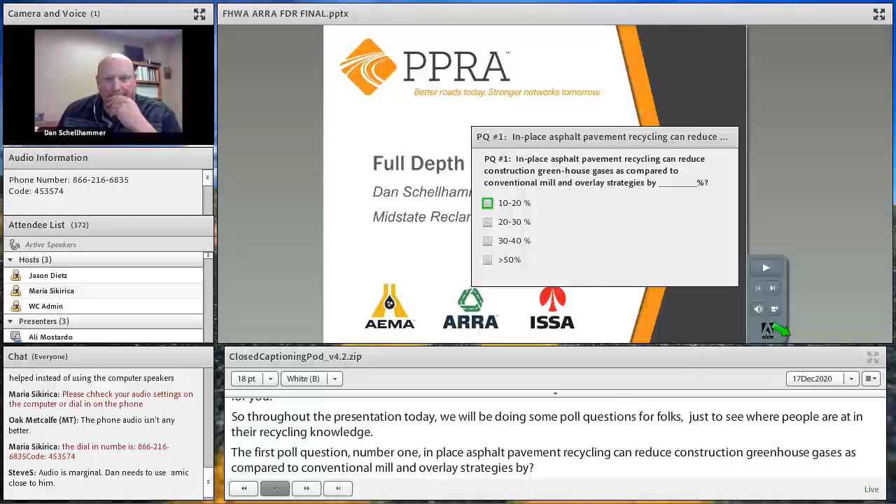Yeah, we're seeing some interesting numbers coming in here. The answer is more than 50%. So when you utilize that tool in the right place and the right job, it can be really beneficial when you're looking at sustainability and project performance there.

So speaking of sustainability, that's one of the things that we're looking at here on our projects. When you utilize the right pavement recycling technique on the right job, you're going to realize substantial CO2 savings. It's going to be very impactful to the sustainability overall of the job, because we're recycling, we're using materials in place that are already there. We're eliminating many, many loads of materials coming to and from a project, and it can be really impactful when you look at the process from a sustainability perspective.

One of the mantras you'll hear from ARRA, our association, is utilizing the right tool in the right place at the right time. There are many different asphalt recycling strategies one can use on projects. The secret to the sauce is utilizing the right tool on the right job at the right time. Once you do that, you're going to save money versus a conventional construction technique.

So keep in mind as we have our conversation today, that when you use the right tool, the right time, the right place, project selection is key. You don't want to jam a square peg in a round hole, because if you do the wrong recycling technique on the wrong job at the wrong time, it'll end up costing you more money, and you won't be able to realize any of those economic or sustainability gains.

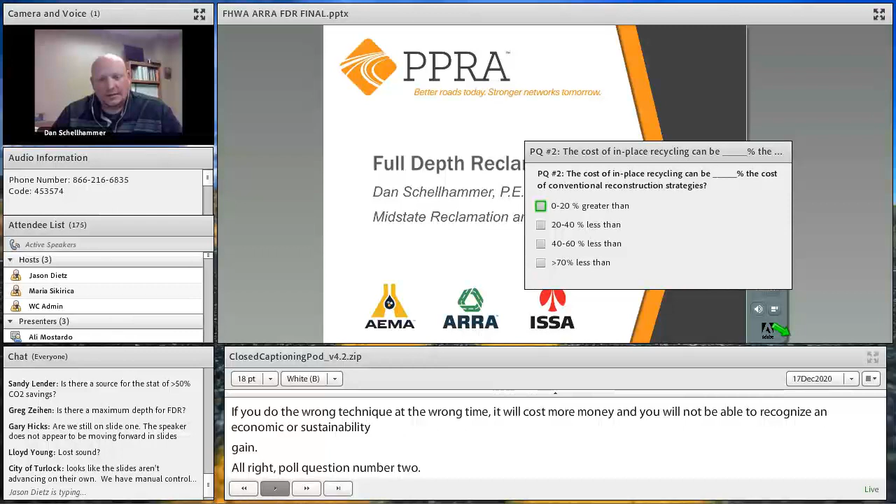All right, poll question number 2: the cost of in-place recycling can be blank the cost of conventional reconstruction strategies. Let's see what folks out there think.

All right, the answer is 40 to 60%. So some good guesses out there from folks. Thanks for participating in the poll.

As I alluded to earlier, full depth reclamation, that construction technique, we like to refer to it as the multi-tool of pavement rehabilitation. There are many different applications in construction where you can use a modern reclaimer. The 4 we're going to focus on today, probably the most popular underneath that FDR umbrella: number 1 is asphalt pulverization, 2 is soil drying or modification of materials in place, incorporating liquid additives to stabilize a layer, and incorporating dry additives to stabilize a layer.

In the asphalt pulverization process, we're going to bring out a modern reclaimer. That reclaimer uses a high-speed upcutting drum to pulverize the full depth of in situ asphalt. The end result is a recycled blended material that you can use as an aggregate base for your roadway project, or add stabilization additives to gain structure for your roadway.

There's a lot of science and technology working behind the scenes for the performance of a modern reclaimer. Once you conceptualize the way a reclaimer works, it's very similar to a garden tiller. Instead of being 9 inches wide, it's 8 feet wide and has 800 horsepower behind it. It's a very powerful machine.

Then the tooth comes in contact with the bottom of that asphalt layer, rips its way up and through that HMA, and comes back around to take another bite of it. Once that material is free of the asphalt layer, it's in the housing and being crashed and banged around. There are impact plates and breaker bars around that housing.

As we're working our way on down the grade, the end result is a nice blended base. What you generally see on an asphalt pulverization project is a reclaimer out in front, pulverizing and sizing that material, followed by a roller—generally a pad foot roller, because we're doing a deeper type of recycling process, 5 to 12 inches—and a blade will follow behind that to smooth the material back down, then we'll finish roll it with a roller.

Something for folks to keep in mind about a modern reclaimer: it has hydraulic doors on both the front and rear side of that housing. The hydraulic doors are there for access for maintenance items, for putting in new teeth, doing welding on the drum, and those types of activities.

When the doors are closed down and in operation mode, that rear door can sometimes act like a screed. What does a screed want to do? A screed wants to push big chunks down and fines to the surface. So a best practice when doing asphalt pulverization is to always dig down below the surface and see what type of gradation you're getting.

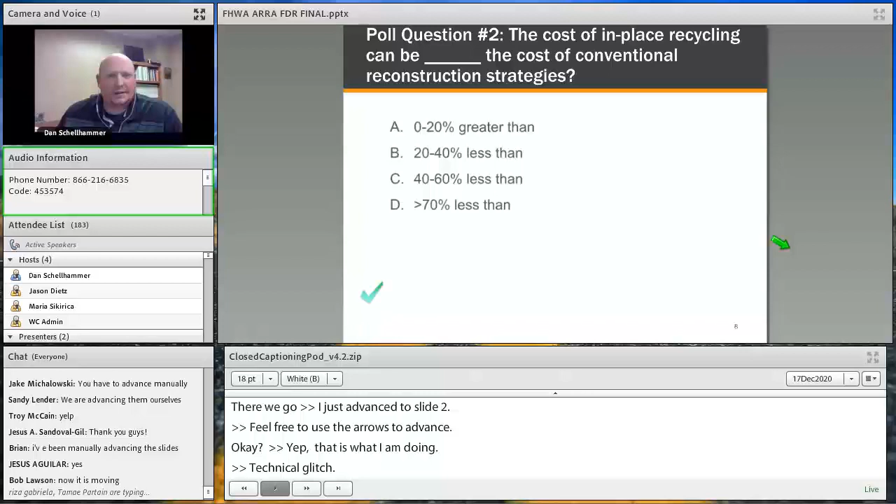Generally, I talk about having to get underneath that asphalt layer. We need to be a minimum of 1 inch below that asphalt layer to cool the teeth in the housing of the reclaimer.

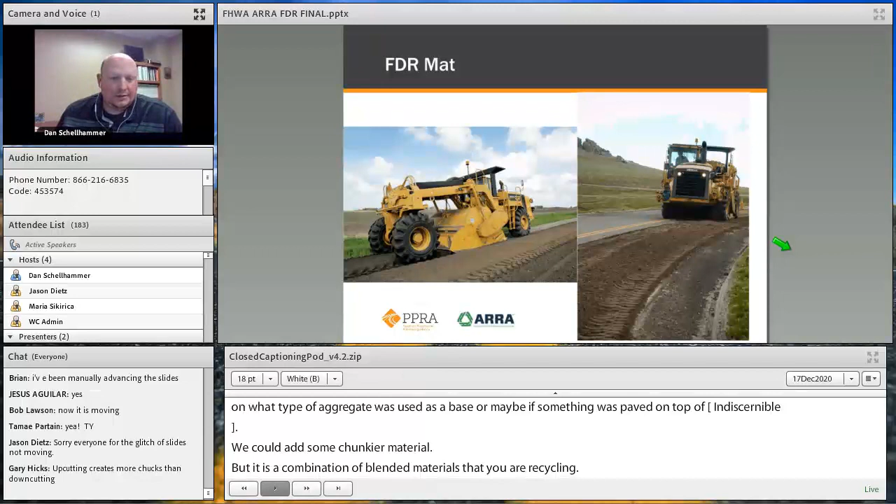Another item of work you can do in the FDR process is soil drying or modification. So what we're doing in this situation is you'll have a project where the grade is over optimum and it needs to be dried down quickly.

Generally, the way folks handle that today would be to farm that material, disc it up and let nature air it out as much as possible, or do a removal and replace with drier material. With the FDR process, you have a third option: modify that over-optimum soil with a dry additive. It could be cement, lime, or something else. It's a great application of FDR.

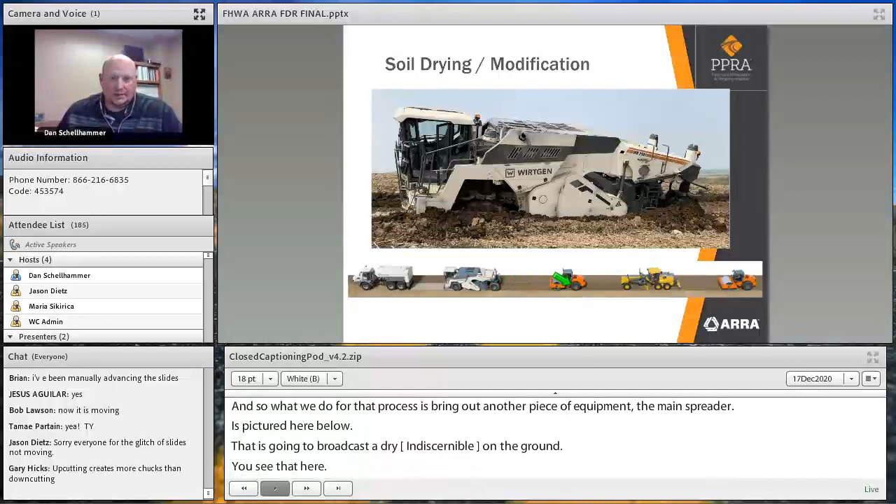As we work our way down the grade, depending on how wet it is, we may or may not want to initially roll that material. You might need to give that additive some time to dry before shaping it, then it'll be graded and finish rolled.

Again, in this scenario of soil drying and modification, it's not an engineered solution. All we're trying to do is dry down that material to a point where we can pass a roll test and work without yielding under any type of loading put on top of it.

Another option under the FDR umbrella is liquid additive stabilization, blending in situ materials with liquid stabilization additives to improve the performance of the engineered stabilized layer. In this scenario, we're able to enhance the material properties of the existing materials on site by adding the liquid stabilizer.

Through this process, we bring out a load of liquid material. It could be emulsion, foam, calcium chloride, or magnesium chloride—we'll talk about that more later. That material is actually injected into the housing of the reclaimer and then blended with the base in place.

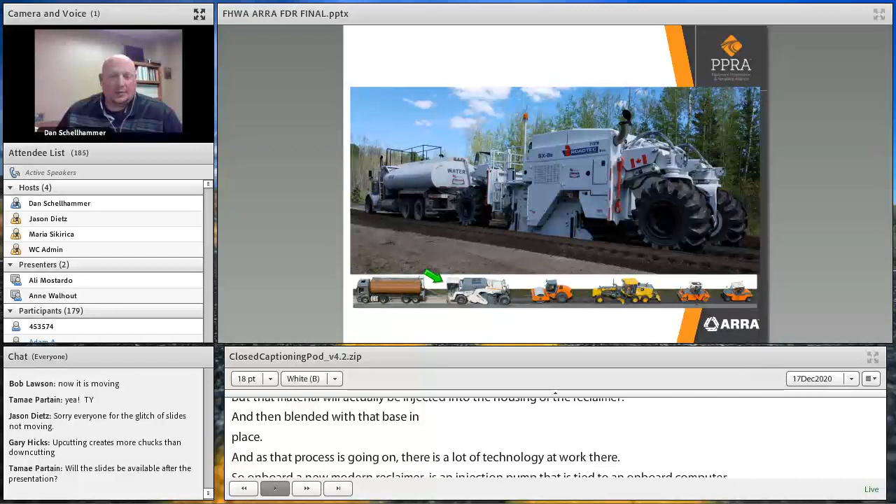As that process is going on, there's a lot of technology at work. On board a modern reclaimer is a calibrated injection pump tied to an onboard computer. The onboard computer knows the speed of the reclaimer and the depth it's cutting, and it takes care of injecting the precise amount of liquid into the stabilized base. After the material is blended, it will be rolled, then bladed, then finish rolled.

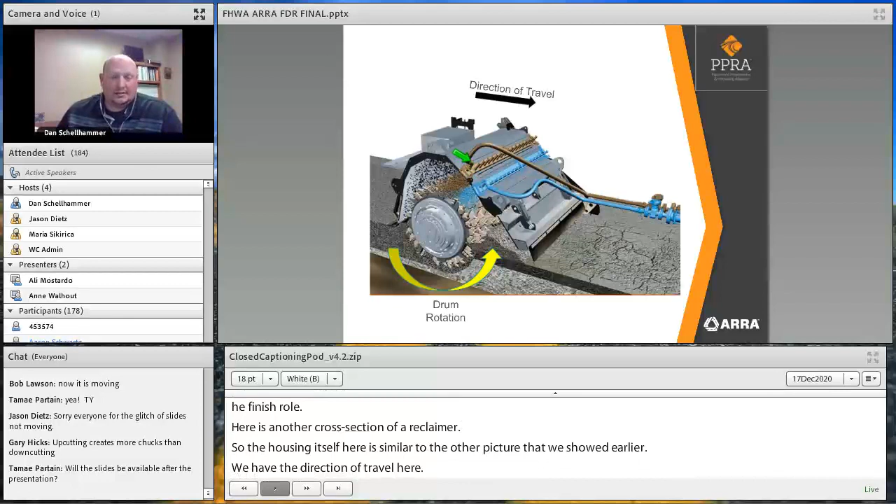Some reclaimers can inject 2 types of liquids at a time. Some only have one, some have none—it just depends on what package the contractor puts on the reclaimer. But in order to do it efficiently and correctly, injecting through that onboard system with an injection pump and a calibrated computer is definitely the way to go.

And then we have dry additive stabilization. Similar thought process, just the additive is dry instead of liquid. We want to engineer or improve the structural capacity of that layer so we don't have to import additional rock or make other pavement design choices at expense to our project. So we make our in situ materials perform better by adding dry additives.

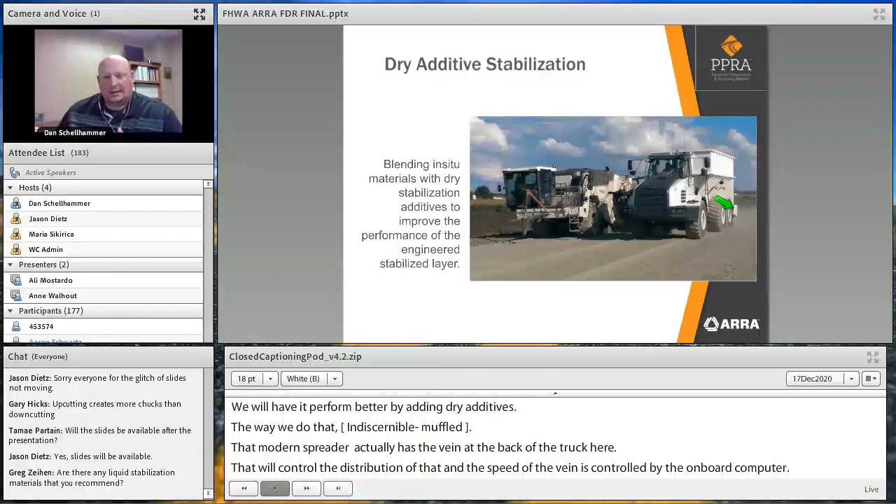The way we do that is with that modern vane spreader. It has a vane in the back of the truck that controls the distribution of that powder. The speed of that vane is controlled by an onboard computer, which knows the speed of the truck and where it is in the world at all times, so it can very accurately distribute that additive on the ground. These modern construction technologies are what has made the FDR process much more repeatable versus maybe some experiences folks had 20, 30 years ago.

When we're doing dry additive stabilization, we're adding a step with the spreading of that material on the ground. Generally what happens is because we're adding this dry additive, it's going to absorb the in situ moisture that's in our stabilized layer, so we need to compensate for that so we can get good density out behind the reclaimer.

We compensate for that by adding water with a water tanker. We hook up that water tanker to a reclaimer just like we would on a liquid stabilization project, using the same technology—that injection pump and onboard computer—to get a precise amount of water incorporated into the blended mix that comes out the back of the reclaimer.

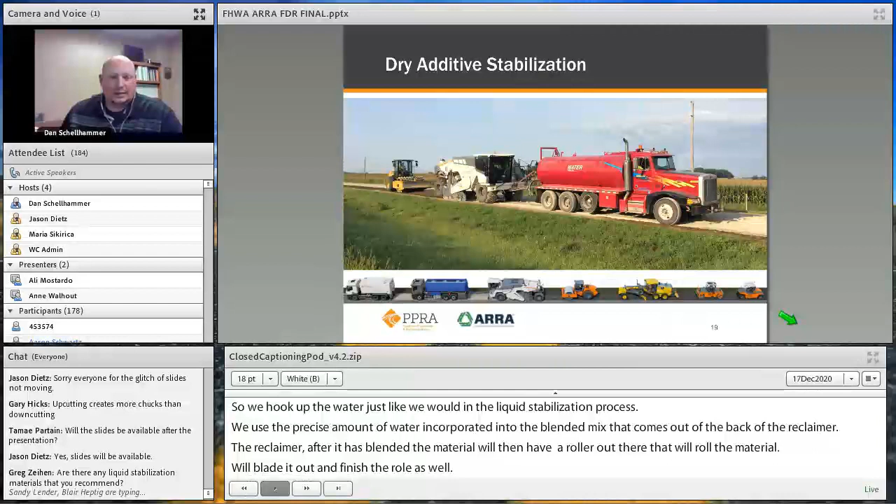The reclaimer, after it's blended that material, will then have a roller out there that'll roll that material. We'll blade it out and then finish compact that as well. Really, optimizing the amount of water we add to that mix is key to ensuring we get good density behind us, in a consistent stabilized layer we can count on for years and years.

So the front of the FDR train, with all that technology going on with the modern reclaimer and the modern vane spreader, is generally where folks like to focus because that's new and amazing and great technology. But the back end is just as important. It's critical to have your compaction and blading fleet, compaction and layback fleet, working in concert with the group up front.

The initial compaction needs to happen with a large pad foot roller because we're stabilizing depths at 5 to 12 inches. And once we do that—one question: are separate pulverization and mixing passes necessary?

This would take a little breakdown. In our experience, yes, they are generally necessary, because once you add an additive, you can't go through and reblend that material. So our preference would be to do an initial pulverization pass and appropriately size that asphalt, then add the stabilization on a secondary pass.

But getting back to initial compaction—you're going to want to use a large pad foot roller for that deep section, and the pad foot roller is going to need to walk back and forth until you start seeing the underside of that drum. You start seeing the pads lift the drum up out of the ground, then you know you have density. It's just a great field observation to make.

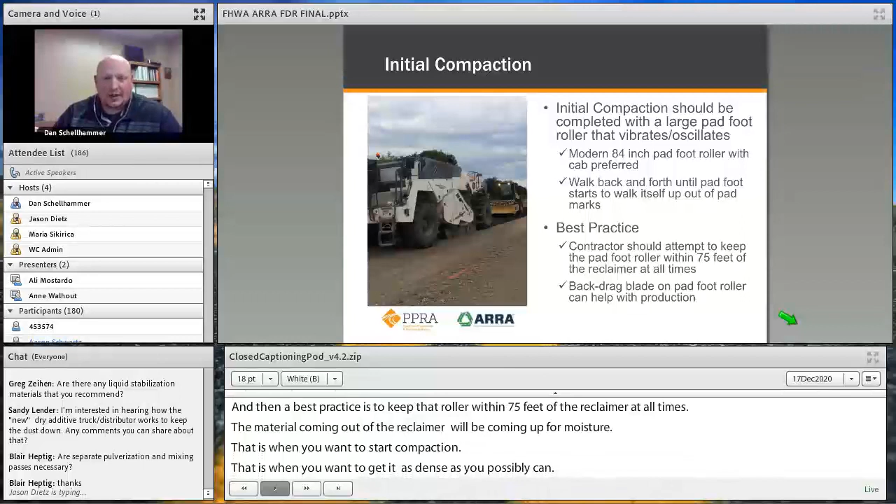We want to get that material as dense as we possibly can. So by keeping that pad foot roller up near the back of the reclaimer, we ensure we're compacting that material at optimum moisture. Then having a back drag blade on a pad foot roller helps out with production a bunch. That's just a better practice, I would call it, not a best practice. It really reduces the work a blade operator needs to do.

After we've done our initial lay down, or the initial compaction, we're going to lay that material back. Generally, in the industry, this is done with a motor grader. Some folks do it with a dozer. Any type of blade will work on a smaller scale project, even a skid steer. A skid steer with a good operator can accomplish this as well. They wouldn't be able to keep up with high production, but it can work. I've seen it work.

What we're going to want to do is initially blade up down to the bottom of the pad marks from that pad foot roller. Basically the bottom 3 to 12 inches of that layer has been compacted. We then need to get those pad marks filled back in and reblade it, and do some final compaction to get the top 0 to 3 inches compacted.

Best practice with the blade, you want to get to the bottom of those pad marks. You always want to maintain the width of the roadway. So an experienced blade operator is worth their weight in gold, especially in today's skills market.

If you have an operator that's not experienced, they'll end up trying to waste some of that material into the ditch. What that's going to do is actually skinny up your stabilized layer thickness, and you need to keep that material up on top of the road top. You don't want to be wasting that material down the ditch. You want to keep it up on top and reestablish that cross slope and profile of the road.

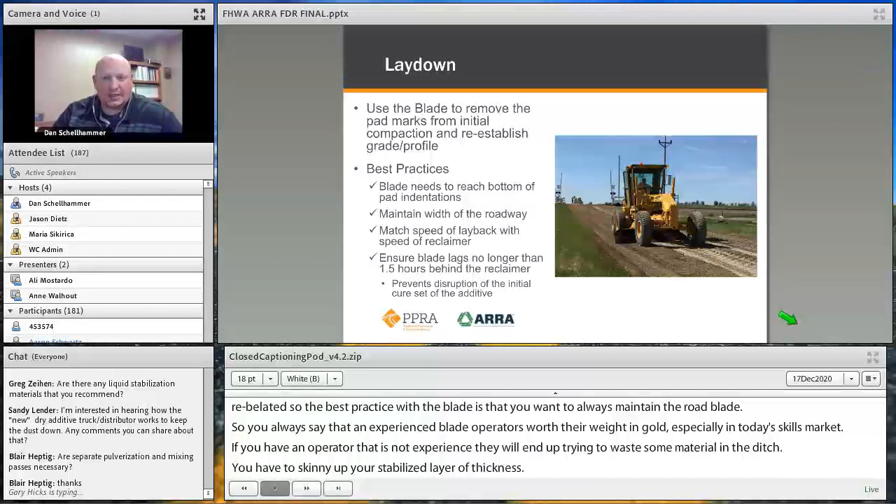And you need to keep up with the reclaimer, and never lag more than an hour and a half behind that reclaimer with your blading work.

Then you want to form your final compaction on that top, 0 to 3 inches of depth. The pass count will be established by rolling pattern. You want to be checking the moisture contents, make sure you're still within the optimal mix design. And then you want to finish that final rolling pass within 2 hours of the blending of the material.

We really don't want to mess with exceeding that 2-hour limit, because that's when your stabilization additives are starting to form their bonds. They're starting to cure themselves out, and grab onto particles to hold everything together and give you that structure. If you're on it past 2 hours, you break some initial sets and you won't realize the full potential you have for really strengthening that layer.

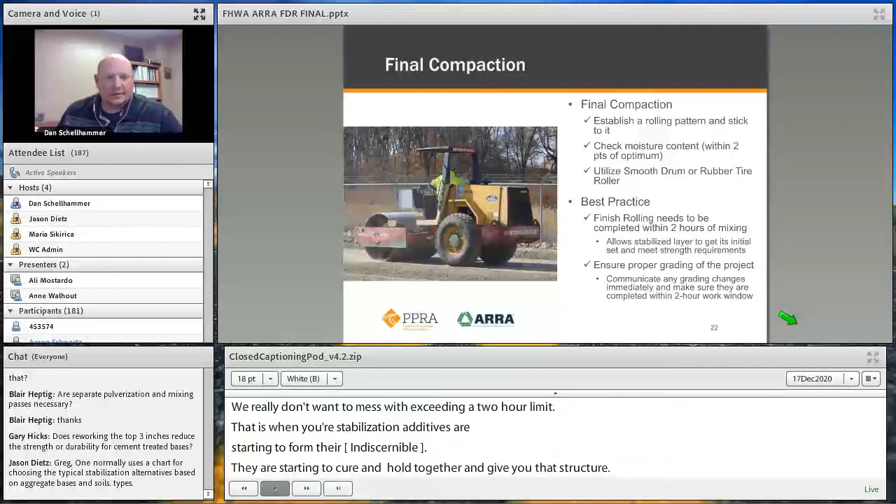All right, so walk through those 4 construction processes underneath that FDR umbrella: asphalt pulverization, soil mixing or modification, liquid stabilization, and dry additive stabilization. All those have the right time that they should be used, and the right pavement condition, with the right in situ material composition. And so another subset of that is you have to use the right tool, the right time, the right place when you get to additive selection.

There's many different types of additives available in the market today. I just tried to list some of the more prevalent ones that are available. On the dry side of things, the powder side of things, you'll have cement types 1 and 2. Just your regular run-of-the-mill cement works really well for stabilizing. It's not near as efficient as lime could be for drying, though.

Lime is a great drying agent that can be either quick lime or hydrated lime. Lime also, in the right conditions in soil with a high enough PI, can also be a stabilizer as well, a really efficient, cheap stabilizer.

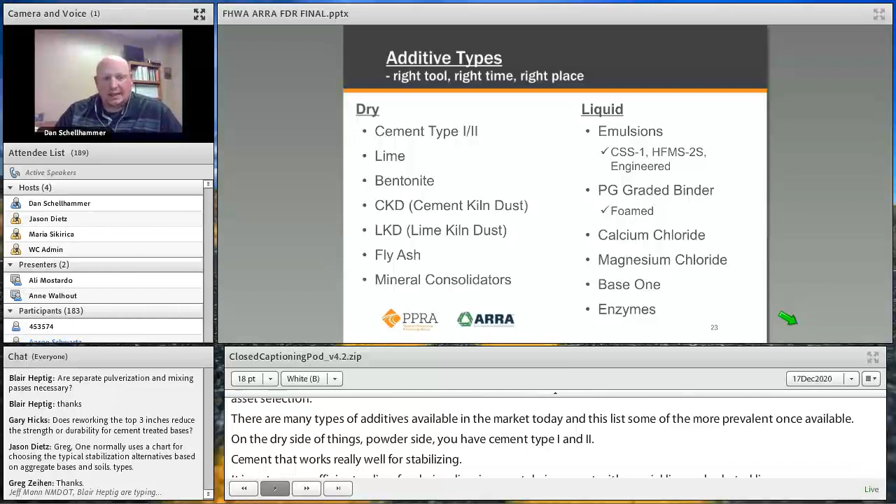We've used bentonite in the past for pond liners, not so much of a roadway application, but I want to point out that the FDR process is really flexible. It can be used in lots of different places. And there's some byproducts that are available that might save some folks some dollars. Those are cement kiln dust, lime kiln dust, and fly ash. All those at varying degrees of availability. Some regions are easy to get a hold of, some they're not.

Fly ash is the one that's really hard to get a handle on, especially because the climate's changing really quickly. So most power plants are switching from coal as their fuel to natural gas, which is making fly ash for stabilization groups harder and harder to come by. Most of the fly ash we're seeing is getting consumed by ready-mix companies. So that's a regional cause and effect, I would say, depending on where you're at.

The mineral consolidators, those are things that help kind of realign the existing particles and give you some extra structure, or might be able to help you dry some things out.

On the liquid side, we have emulsions. Most folks have moved to using engineered emulsions at this point. Not too many people are still using CSS-1 or HFMS-2S.

There's PG-graded binders that you can foam, that hot oil you foam, and incorporate into your asphalt pulverized base. Calcium chloride, magnesium chloride, base one enzymes - these have all been used as well in that type of application.

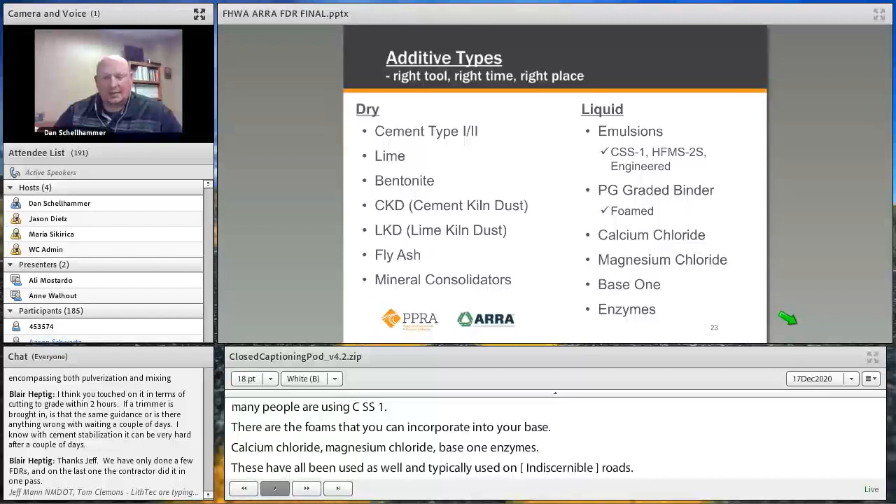Generally those are used on lower volume roads, gravel roads. We've seen calcium chloride used really successfully on gravel road projects where you maybe have to blade that road every 2 to 3 weeks because of washboarding. If you inject calcium chloride and blend it in that top 4 inches, you can reset your blading efforts. Instead of blading every 2 to 3 weeks, it could stretch out to 6 to 8 weeks, which can really help a county or city out that has that type of application.

And with all these different additives, they all have their different price points, and they all work best in different soils and materials. So you really need to optimize the use of those on your project with the material that you have in place.

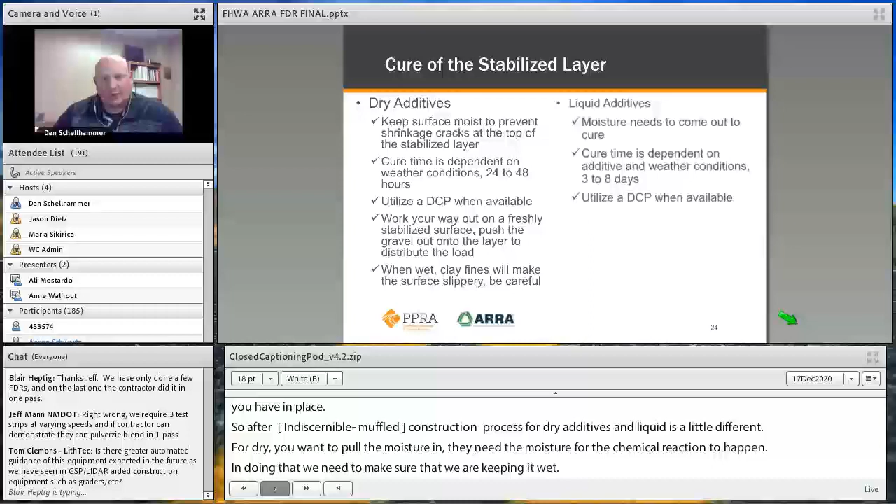So after we've completed our construction process, for dry additives and liquid additives, the curing process is a little bit different. For dry additives, they're going to want to pull moisture in - they need that moisture to gain their strength for the chemical reaction to happen. So we need to make sure we're keeping it wet, either watering down from the top of those stabilized layers, or covering it with a light fog seal to prevent that moisture from escaping. Cure times are dependent on weather conditions, but they're usually 24 to 48 hours.

A great tool to have on a stabilization project is the DCP. They're really cheap, and they prove out, and you can see a lot of repeatable results using a DCP. You use it to watch the strength gain of that stabilized layer, so you know when you can get traffic on it, or when you can load up your trucks or other things. It's a really good tool.

If you do need to get on a stabilized layer early, a better practice would be to end dump that gravel on the stabilized layer and push it out. Don't run loaded trucks over the top of it when it's still fresh and new.

Another safety item to be aware of if you're stabilizing clay: at times after a rain event on clay that's been stabilized, those clay fines can get a little bit wet, the top gets greasy, and it can be a little bit slippery. So if you're putting traffic on something like that, you're going to want to dirty that surface up with some aggregate or something else. Just something to be aware of.

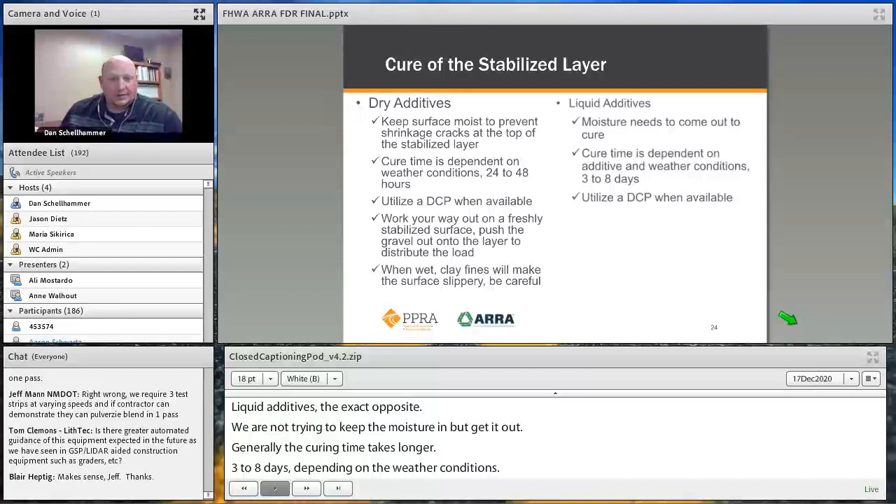With liquid additives, it's the exact opposite - we're not trying to keep the moisture in, we're trying to get the moisture out. Generally that curing time takes longer, 3 to 8 days depending on weather conditions. But during that curing period on liquid additives, the surface is generally more forgiving, so you can get traffic on it a little bit sooner without causing problems. And a DCP is a great tool to use when you're analyzing the strength of that material.

What do we surface this FDR stuff with? Well, it has to be surfaced with something, right? They have higher voids than HMA, so they're susceptible to water infiltrating that stabilized layer. So you need to cover them up and protect them. There's a lot of different options available to folks - those decisions generally come down to economics and traffic volume. We see just one lift of HMA being placed on some projects, sometimes multiple lifts, sometimes fog seals, cape seals, chip seals, or any other type of pavement preservation treatment. If you're curious about the types of treatments out there, you can check out roadresource.org and get more information about the options available to you.

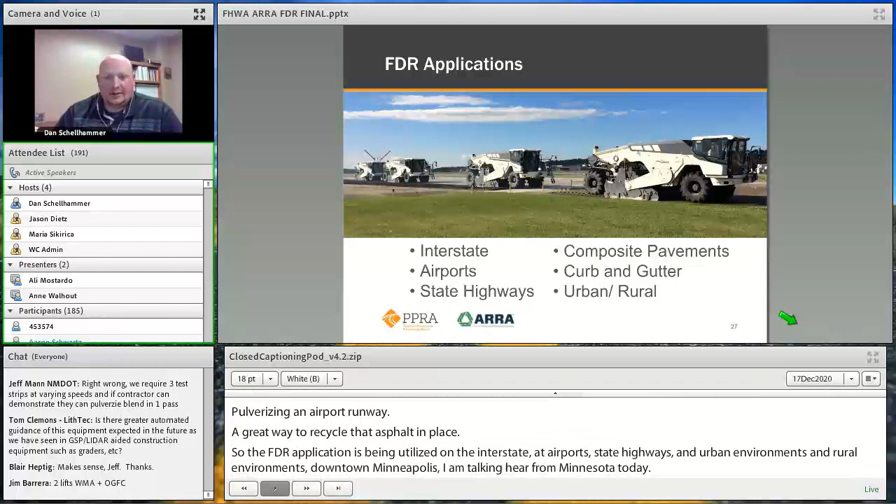Downtown Minneapolis here, I'm talking to you from Minnesota today. It's happening downtown, and it's being used in conjunction with composite pavements, right up next to curb and gutter. So it is a very versatile tool that can help you out a bunch.

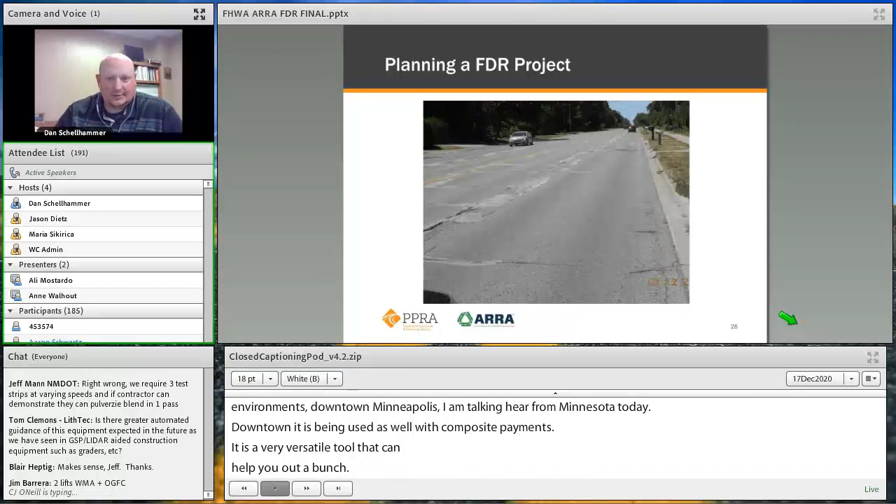Well, I can see some wheel path rutting. I can see probably multiple attempts to do some crack sealing. There's longitudinal cracks, transverse cracks. Some spray patching has gone on. Some more in-depth pothole patching has happened. The asphalt that's there is oxidized and shot.

And so really, you don't have many options left for this road. You're kind of down to that point of needing to reconstruct it. So, well, you should really consider doing FDR. This type of road would be a great candidate for FDR.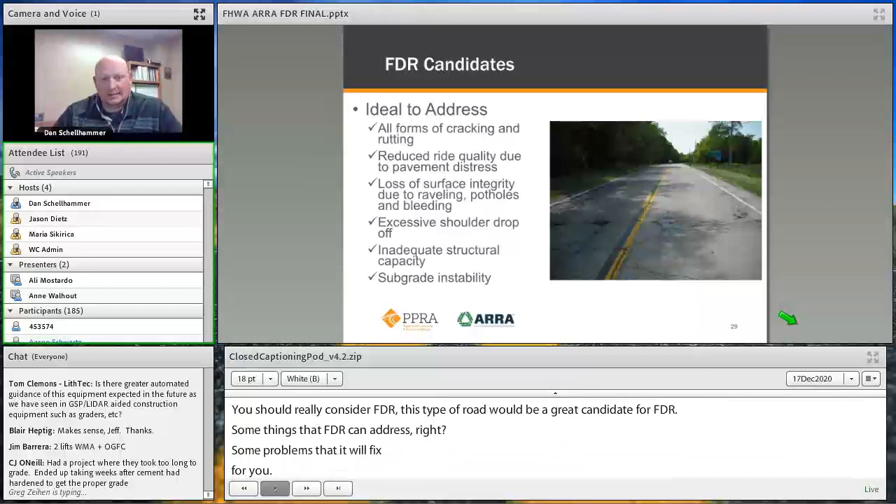And some things that FDR can address, right? Some problems that it'll fix for you. It'll take care of all those cracks and ruts, because we're going to remove that asphalt. Not remove it, we're going to recycle it in place by pulverizing it. So that's going to reset that crack pattern and get rid of all those ruts.

Through that process, we're going to need to overlay it with something, so that's going to take care of your ride quality issues. If you have a road where you're seeing raveling, potholes, bleeding, old oxidized asphalt that's just not holding together anymore, we're going to repurpose it. We're going to give it new life through the FDR process.

And we can definitely take care of shoulder drop-off issues on a job, because we are recycling that material in place. We are going to be able to spread the pulverized material back out and reestablish the shoulder and the cross slope, and build those back up. And then if you do have inadequate structural capacity or subgrade issues, we can stabilize that material, shore it back up, strengthen it, and get it to perform in a way that meets our needs.

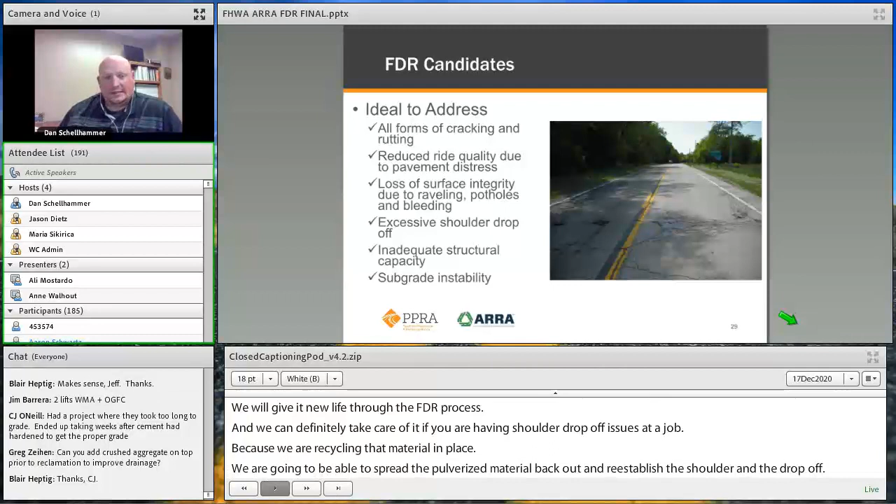So in the pavement planning process, the first thing we need to do when we're analyzing whether a job needs FDR is to perform an accurate pavement assessment. This is really going to be done on any project. What does this all entail?

We're going to take some cores and pay specific attention to those cores as they come up out of the core hole, and document the condition of those cores and really what's going on there. GPR, ground penetrating radar, is a great tool to know how uniform your asphalt thickness is. We need to understand the type of traffic counts that roadway has experienced to date and what type of traffic counts you'll have in the future when we're going through our engineering design.

We're going to want to look at drainage. Water can kill a road. It does often, right? So we have to ensure the water's getting away from our pavement. And then we have to look at that subgrade. Is it strong enough? Is it stout enough? Do we need to stabilize it? Do we need to enhance it? Or is it good enough to just pulverize that material?

And we always want to look at construction records and see how many lifts of chip seal do we have on there. Is there any paving fabric in that stabilized layer or even in the HMA? And just so folks know, reclaiming paving fabric for our company has never been an issue. We generally tear that material up very efficiently and quickly. The only issue you might have is when you look behind the reclaimer at that pulverized material, we're pulverizing paving fabric. We can get that material down to maybe 3-inch by 4-inch max sizing. Generally it shreds up a lot better than that, but you might see a tail flipping up in the air in the back of the material behind you, but we can't remove it. But we can definitely size it down so it won't have ill effects on that pavement structure.

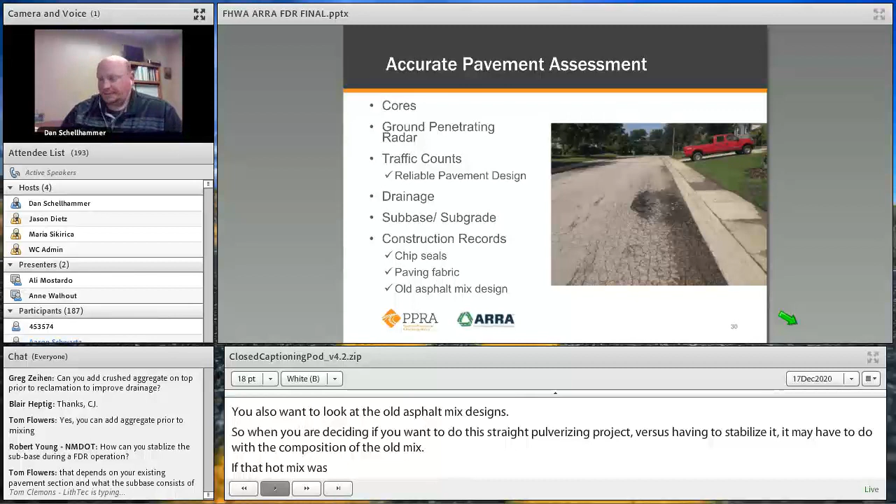When you're pre-planning, there's some new technology and some new tools out there that are really, really helpful. FWD, falling weight deflectometer, that's going to tell you what the strength of your road is. It'll help identify where any weak spots in the road might be. It's a great tool. GPR as well, I kind of said already. And then coring, I'm just going to tell you how deep those materials are.

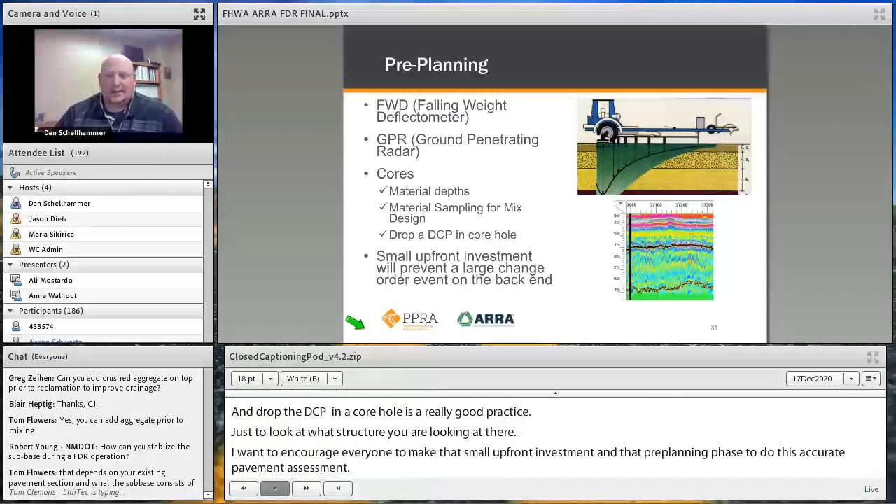So to get you materials for doing a mix design, dropping a DCP in the core hole is a really great practice, just because you're looking at how structurally sound things are. We want to encourage everybody to make that small upfront investment in that pre-planning phase to do this accurate pavement assessment. It's a cheap insurance policy that'll prevent you from having a large change order out in the grade during construction. It can identify a lot of problems that are out there.

I just want to give an example of that, the power of coupling both GPR data and FWD data together on top of each other. So we did a job in South Dakota with a county there, the highway superintendent, and they wanted to do 8 miles of cold-in-place recycling on this project.

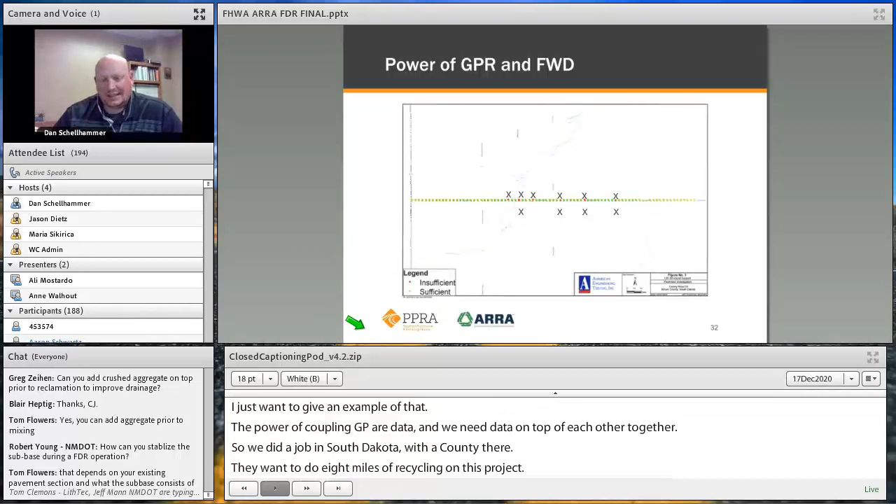And the county highway superintendent had not been in this position very long, didn't really know the history of the road that we were going to potentially recycle. So we encouraged them to go through and do an accurate pavement assessment. And as we went through and did that on this 8-mile section of road, we were able to identify with some really good accuracy areas where he had deficiencies, where he didn't have enough structure to hold up the traffic loading that he was anticipating.

So we were able to then change our plan. Instead of doing CIR on the full 8 miles, what we did was in these isolated locations, we did FDR. We fixed those spots with insufficient structural capacity. I incorporated 12 inches of stabilized material with cement.

So on an 8-mile job, about 7.5 miles got cold-in-place recycled, and the other half mile we performed cement stabilization. And it worked out really well. There were no change orders on the job. There were no soft spots, dig outs, anything else. And we never would have identified those ahead of time if it weren't for that project planning that happened up front.

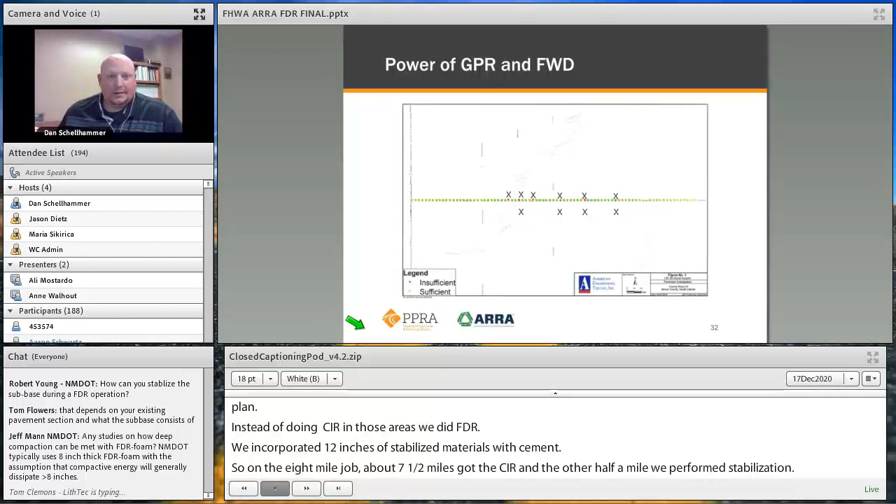So mix designs are a great tool to optimize the amount of stabilization additive we're putting into the road. And that's the goal of a mix design, is to optimize performance of that stabilized layer. There are many different examples out there of what a mix design process can be, specifications and other things. We're not going to go over all that today, but the outcome of a mix design would be to optimize the additive incorporation rate and then communicate to the contractor how much that material needs to get into the stabilized layer.

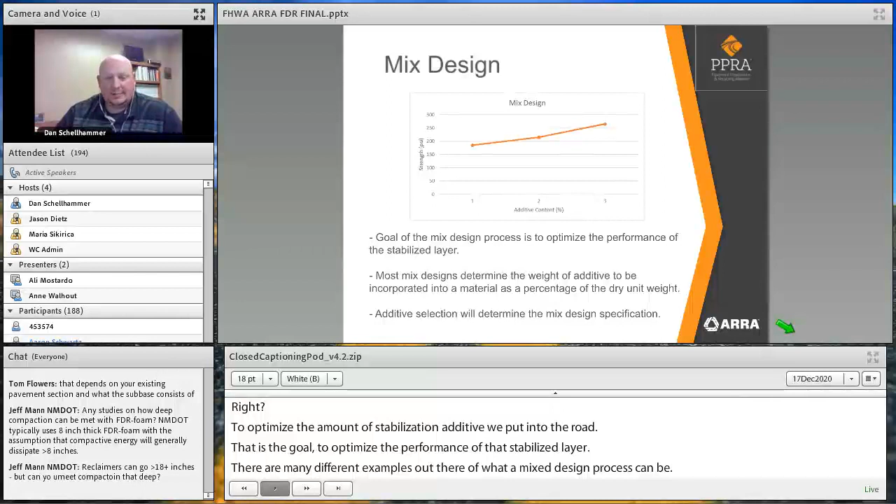Generally, it's communicated to folks in pounds of dry additive per square yard or gallons of liquid additive per square yard. But that's what the mix design process is for in a stabilized type of configuration.

And just best practices for that pavement sampling for mix design, we're going to need a lot of material, about 400 pounds. And what you're going to do is, if there are multiple lanes, you want to vary our sampling across those lanes. You definitely want to vary the location of your samples across the width of the lane as well. Include shoulder material. And then always, when you're pulling the core out, make some visual observations at the bottom of it to see if it's stripped out, and collect some of that stripped material to communicate to the lab what does that base or subgrade look like down below.

The mix design process, we'll be able to see how varying that additive in our mix changes the characteristics. Are we strong enough, not strong enough? How does that help? And develop a curve.

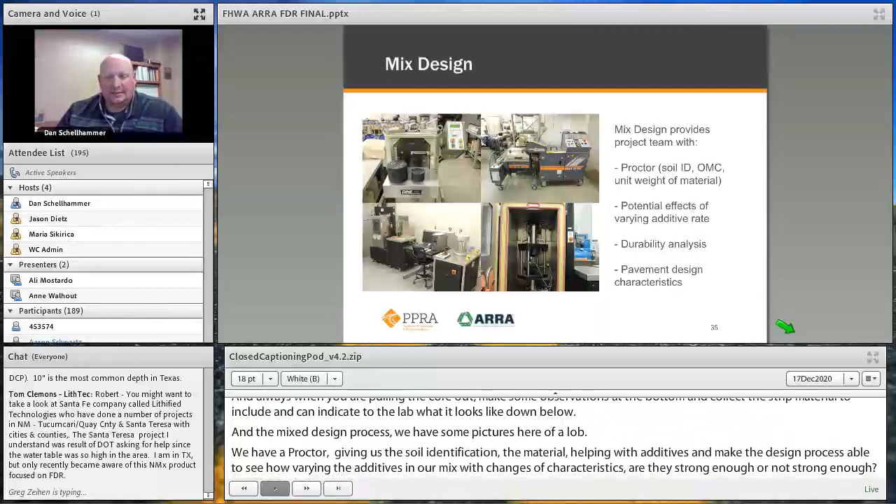We're also going to do some durability analysis if we want to. We can run that material through freeze-thaw scenarios. We can run that material through the Hamburg wheel, looking for rutting potential, especially if you're looking for that stabilized layer to perform at a higher mark. You're going to want to run it through some of that durability analysis. And then we're looking for being able to communicate the pavement design characteristics that the engineer is looking for.

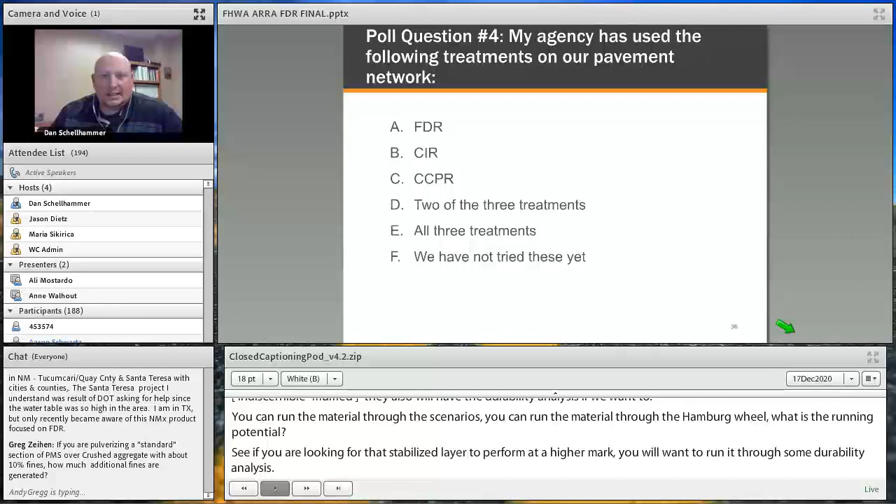We have a poll question here, poll question number 4. My agency has used the following treatments on our pavement network.

It looks like FDR is winning the day there. Good. There are many applications for FDR out there in the world.

So now I want to hit on just kind of the quality control process and some best practices that are available today.

Really, a great quality control program starts out with a rock-solid project specification and knowing what your quantities are, right? So that we can communicate to the team that's building your job just what your expectations are and what your needs are. So it's important to have accurate construction plans, accurate quantities, and then explain to the contractor what your mix design requirements are.

Some entities will do that mix design themselves, pre-letting, and communicate that information to the contractor. Some owners will have the contractor do that mix design for them, and have them be responsible for developing that plan. All they'll do is tell you how the mix design should be performed, how it should be analyzed, the threshold that stabilized layer needs to get up to, and tell the contractor, hey, you go optimize it. So there's lots of different ways to do that.

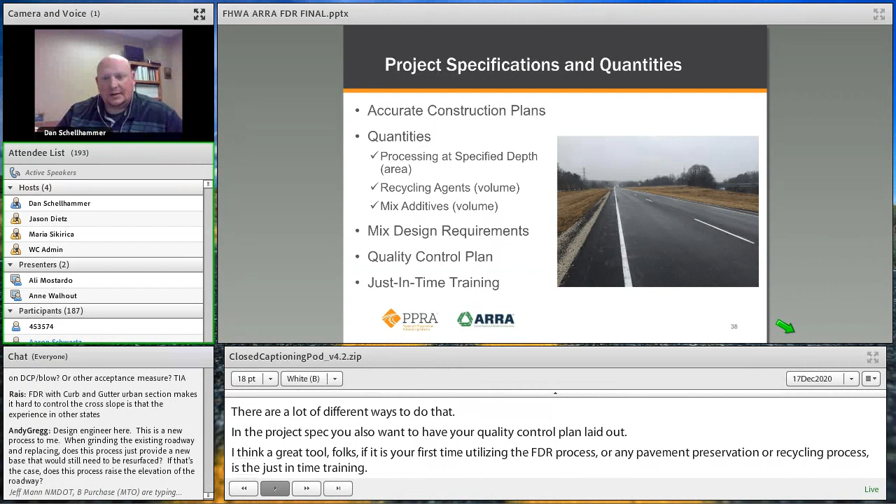The idea behind that is generally about a week or so before that FDR construction process is going to start, the contractor will bring out an industry expert to educate everybody that's on the project team about the process. Any project manager, anybody doing QC, QA out in the field there is going to get some training on just what to expect with the FDR process, how it works, what to look for. I think it really helps create a much better final product, and gets everybody on the same page with where a job can start.

The quality control, right, everybody trusts the contractors that are working for them. But what we need to do is trust but verify what they're doing out there. So in an FDR, full depth reclamation scenario, what are we trying to keep track of? What material properties are important to keep an eye on? Well, number one is the gradation. Whether you're pulverizing or stabilizing, that gradation information needs to be within specification.

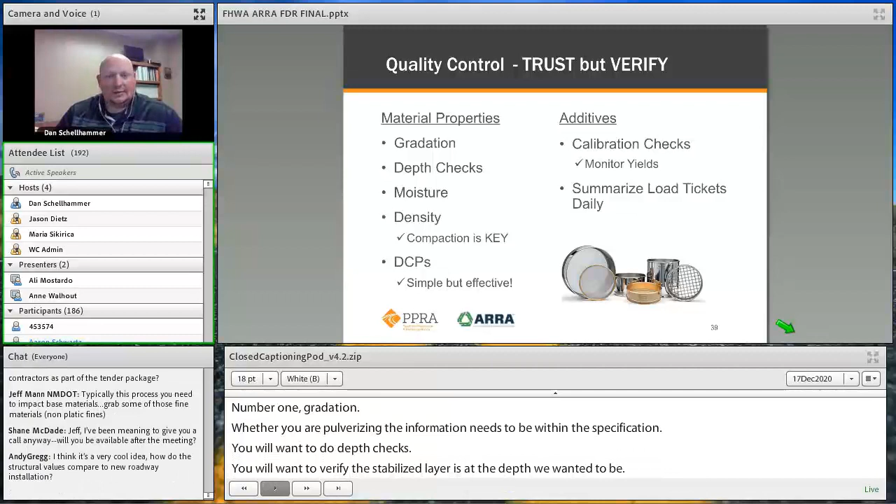You're going to want to do depth checks. You want to verify that the stabilized layer is the depth that we want it to be, or that we're recycling the full depth of asphalt and getting down where we want to be. Moisture and density, those two work together. We need that information. It has to be communicated in real time to the construction team so that we get that optimal density and get compaction. The DCPs, we love using DCP because it gives us a lot of great feedback, real-time feedback, and it's pretty easy to use.

So those are the material properties that we're looking at, and then the tools we're going to want to use, the additives. There's some things we're going to do when we're in the stabilization mode. We're going to want to be doing calibration checks to make sure that the metering equipment we're using is yielding correctly. And as always, you're going to want to summarize the load tickets.

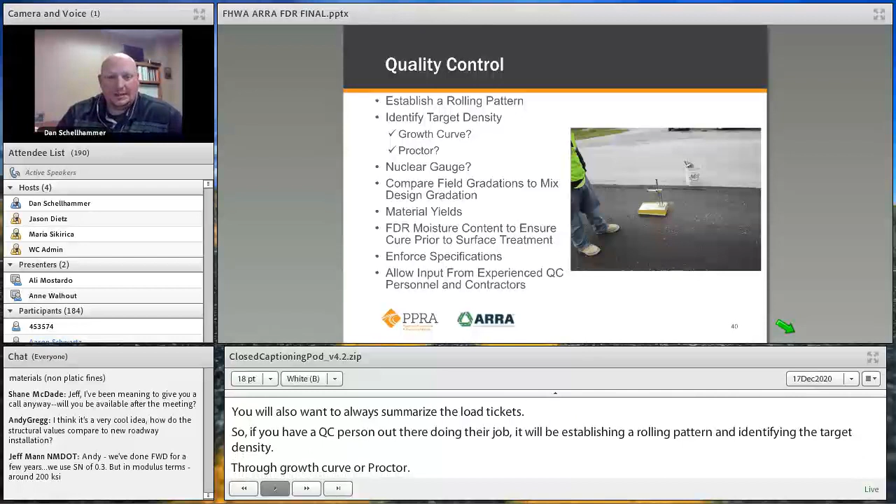So if you're going to have a QC person out there doing their job, they're going to be establishing a rolling pattern and identifying that target density either through a growth curve or a proctor. If you're doing a growth curve, that might need to be done several times a day, sometimes just once a day. But if you're going through varying materials, you're going to need to stay on top of that.

That's done most easily with the nuclear density gauge. We're going to want to be comparing field gradations to mix design gradations. So if those gradations are similar, then our stabilization additive incorporation rate will be spot on. If those field gradations start to differ, then we may need to reprocess some asphalt, repulverize it.

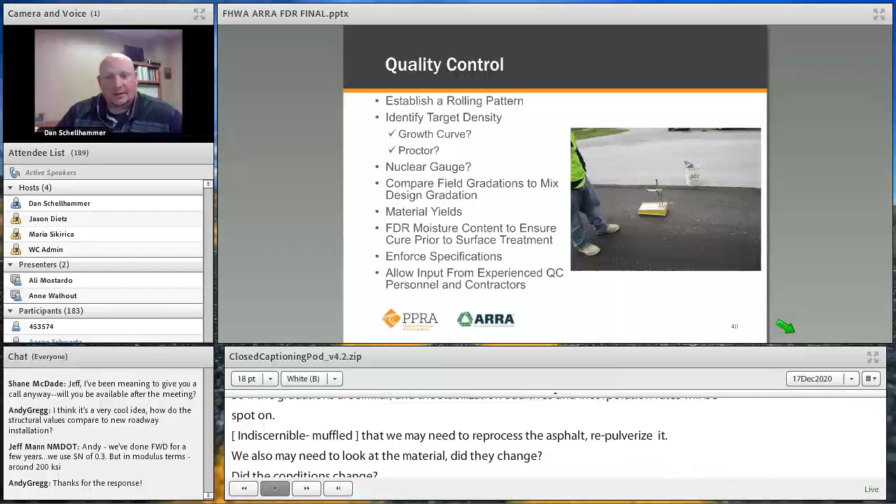We also might need to look at the materials. Did they change? Did the in-situ conditions change? We didn't catch it in the coring phase. We haven't identified it. We have some new stuff out there. We need to get together as a project team, analyze that, and come up with a working process moving forward.

By comparing those gradations, we want to look at material yields, and then after construction, we're going to want to monitor moisture content. Moisture content is going to indicate when we can surface that material. And always enforce specifications and allow input from the contractors, and encourage input from both the QC personnel and the contractor.

I always like this picture. It kind of encapsulates what's going on a dry additive stabilization project, right? We have that reclaimer that's blending the material, pulling water out of a water truck, injecting it into the housing. There's the dry additives on the ground, already broadcast. I put rollers right behind that reclaimer. The blade is there working that material right in concert with what's going on with the smooth drum roller behind.

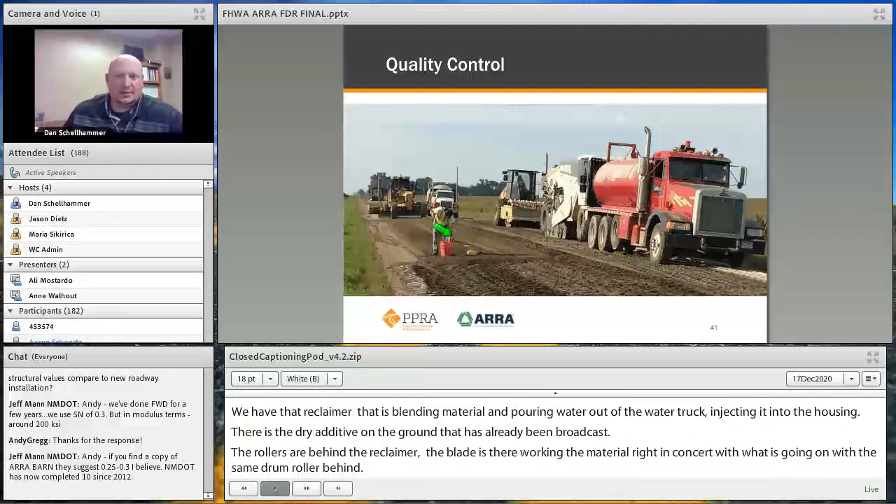And then you have a QC technician out there, right, working their butt off and doing their job. I'd say one of the things that QC technicians are going to want to do is throughout the course of the day, check moistures out in front of the reclaimer, and then check the moistures of the material that we're stabilizing and producing in the back. That moisture in front of the reclaimer will be communicated to the operator of the reclaimer, and then we'll figure out how much water needs to be added.

And if that injection system is working right, and we're adding the right amount of water, then we'll be right at optimal moisture behind that reclaimer. So it's important to have that QC technician work in concert with the contractor there to ensure you have a great stabilized product.

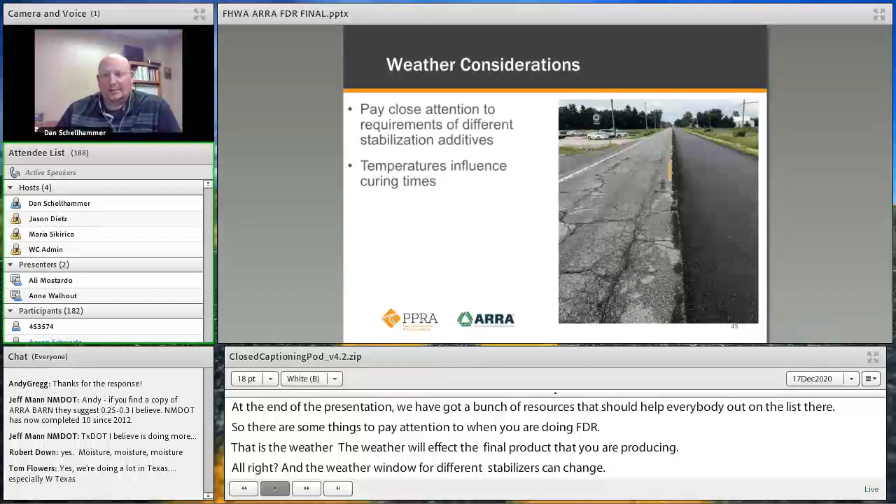So there are some things to pay attention to when you're doing FDR, and that's the weather. The weather will affect the final product that you're producing. The weather window for different stabilizers can change, right? Generally, if we're injecting some oil, we want to have that temperature be 50 degrees or above. Once it gets below 50 degrees, you might start seeing some raveling and some issues with densities. If we have freezing temperatures, we do not want to be adding cement because those frozen temperatures will flash that hydration process and it'll just stop, and then you're not going to get the results you're looking for.

Understanding when the work will be going on, what type of work is going on, and how temperature and weather can influence that stabilization additive is critical. Picking the right tool at the right time, the right place.

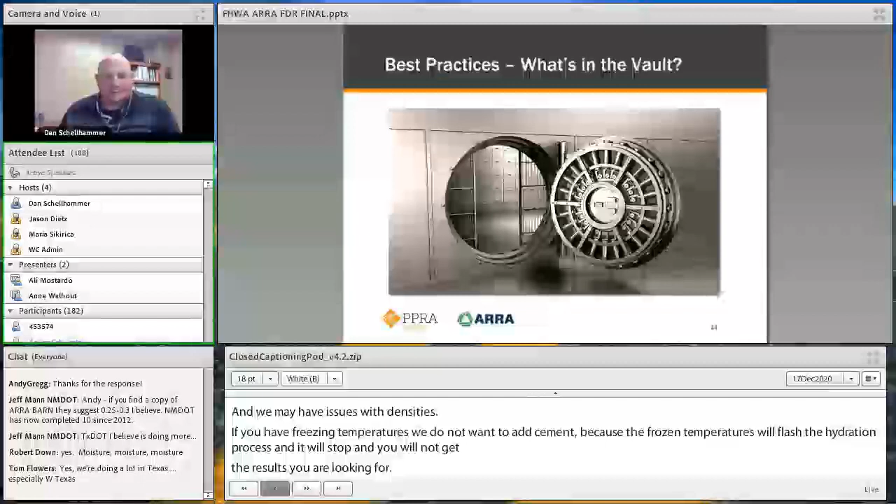Just want to run through some best practices, some different ideas that are out there, show you kind of what's in that best practice vault.

What are the keys for ensuring you have a successful recycling project? Number 1 is project selection. So the construction community has gotten together and really worked on getting equipment out there that can provide you with repeatable results, right, by putting into place engineered controls through that equipment. So now that that issue is no longer a problem with the FDR process, really project selection, getting the right tool on the right job at the right time becomes critical.

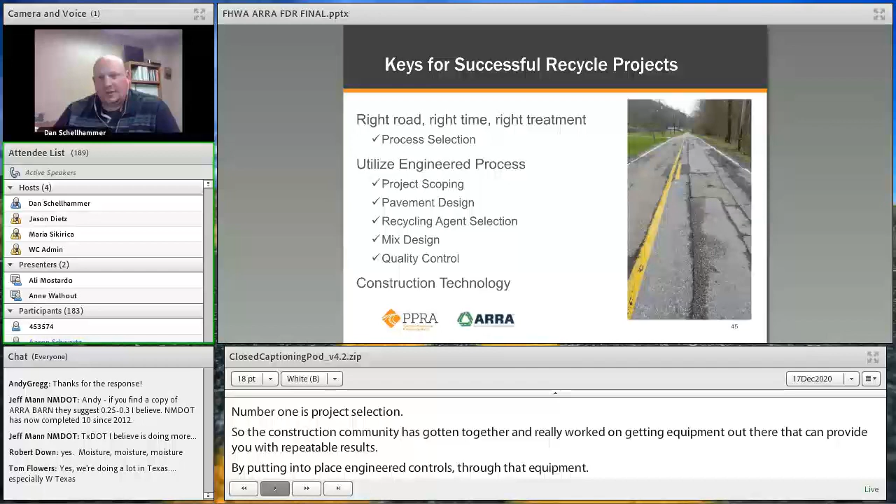And if you're going to do that, you want to utilize all those engineering advancements that we have made, right? You want to do FWD, you want to do GPR, you want to utilize the information that you get through the mix design process. All that technology is involved in the quality control process as well, right? Use all those tools that are at your disposal. And then always ensure you're utilizing modern construction technology on a project.

And that'll ensure you go from having a patchwork project to a great completed product.

There is some concern, or it might even be just discussion points. These aren't necessarily go, no-go for FDR, but they're things you really need to account for, things we really want to watch out for. One is widespread subgrade failures. If you have that going on, you really need to find out what the source of those issues are.

The FDR process can overcome many of them. The ones it struggles with are probably what any roadway project struggles with, which would be water. If you have a roadway with multiple springs underneath it and it's really wet, you're going to need to address that. The FDR process can't fix that. If you have a lot of frost boils, the FDR process can help with that initially, but if you put stabilized materials over a frost boil, it won't last near as long as you anticipate because of those forces in nature with water pushing up and down.

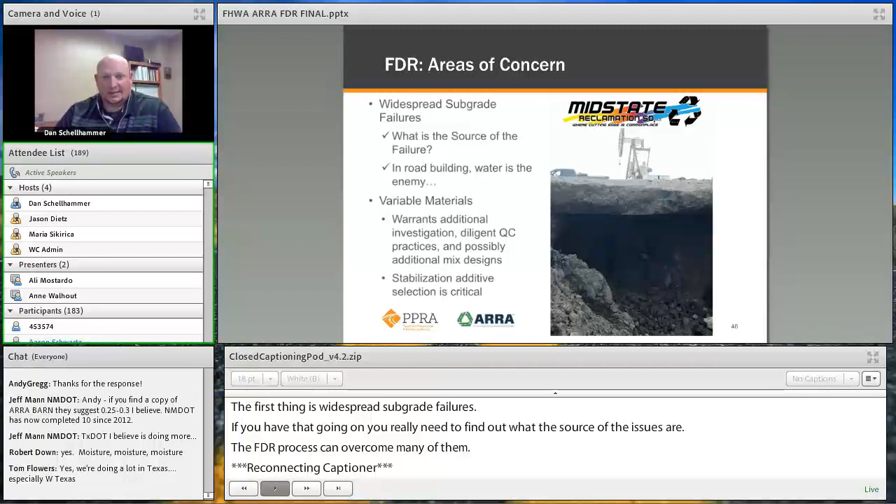Other areas of concern are variable materials. This happens on some projects, where that material, if you're working in subgrade, might go from being a silt to a clay to a sand, or a combination of those things back and forth. So when you look at your stabilization additives, some of them work in a really wide band of materials, some work best in a very narrow band. So if you have a wide band of materials, you have to match up your stabilization additive with what you have out there in the field. Just something to be conscious of. That's why we talked about utilizing the right tool, right time, right place. That goes not only for the construction process, but for the stabilizer you're using as well.

Some safety components to talk about here with the FDR process. Traffic safety is number one. That's something that's always going to be a concern. This equipment is bigger than like a 950 Cat loader, and they're heavy. It can lull you into complacency in that they don't always move real fast, but it can be kind of dangerous. The traveling public, the roads getting busier and busier, traffic safety is very important.

Extremely hot oil if you're running through the foam process. That oil is going to be 310 to 325 degrees Fahrenheit. We have a mobile platform that's working its way on down the road. You really need to be conscious of what you've got going on when you're foaming jobs with a mobile platform like that, and really respect that hot oil.

You want to respect the equipment too. It's the size and speed of that equipment. There are cameras on those, backup alarms, mirrors, all types of things to help see around that equipment. But best practice would be always making eye contact with that operator when you're working around equipment.

Then there's dust if you're doing dry additive stabilization. If you have a day where the wind picks up, exceeding 15 to 20 miles an hour, that might be a day where you can't do your FDR process because that material will pick up and blow away. So you need to reduce those effects by keeping an eye on the weather. And then always have a spill plan, whether it's a dry additive or a liquid additive. So you should always, in a pre-con, have that discussion.

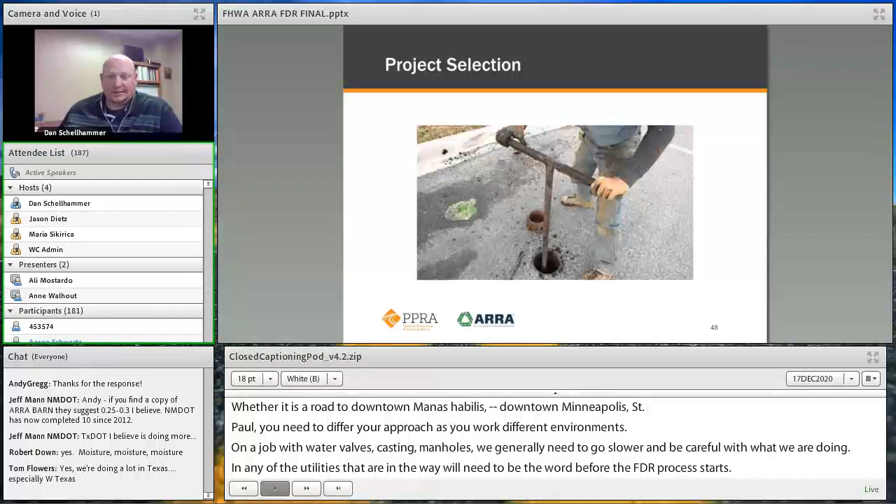Any of those utilities that are in the way will need to be lowered before the FDR process starts. The way that reclaimer is designed, it has a lot of power behind it, and it will either destroy whatever's in front of it, or it'll destroy itself. There's no kind of easy off button. So if we're going to encounter a water main valve, we're just going to obliterate it - that's what's going to happen with that reclaimer. And nobody wants that. So you have to be very conscious of what utilities are in play when working in an urban environment.

Working next to curb is another animal. We're never going to want to have that drum get in contact with the curb because it's going to damage it. So what an operator will do is get as close to the curb as they're comfortable with, and then we'll have a skid steer operator behind us. That skid steer operator will peel away whatever sliver of asphalt we can't get to from the curb, and throw those peels back in front of the reclaimer so it can size it, and that material gets pushed back in the hole with the blade. It's really an efficient way to recycle asphalt in an urban environment.

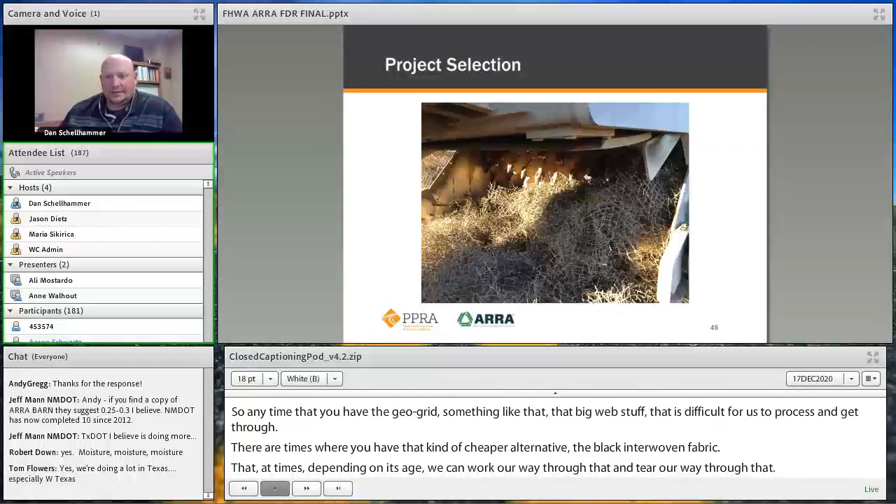Cobble - some parts of the U.S. encounter this, some parts don't. Cobble, glacial till, whatever you have going on in your subgrade - most reclaimers can process material kind of softball size or football size. Get bigger than that, and that glacial till will actually tear the reclaimer apart. It'll break off the teeth, the stands, you'll blow out a planetary. It's not good. So I would say a road with cobble is not necessarily a no-go type situation.

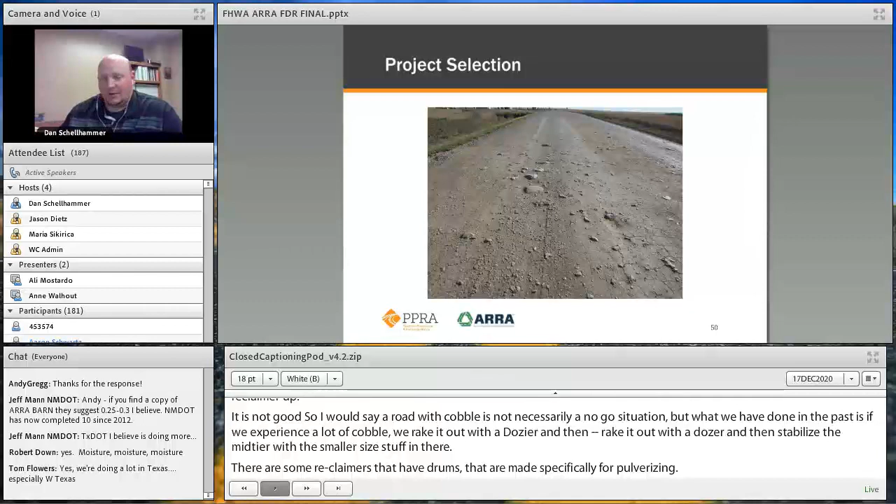What we've done in the past, if we experience a lot of cobble, is rake it out of there with the dozer, pick it out with a cobble bucket on the skid steer, and then stabilize that material with the smaller size stuff in there. There are some reclaimers that have drums made specifically for pulverizing that type of cobble, but not a lot of contractors have that type of drum in their fleet. So you should expect either way an elevated bid price when you're going to have that type of stuff on your road.

So some ideas with the FDR process here to think about as you get more and more familiar with it. Those of you that have done FDR for a while, start thinking about combining additives for superior performance of a stabilized layer. We're seeing this in the cold in-place recycling world as well.

If you had originally planned on doing an engineered emulsion project, injecting about 5% cement or 5% engineered emulsion, try adding 0.5% of cement to that. See how much that improves the performance of what you have going on there.

By incorporating multiple stabilization additives, you gain a lot more flexibility and can use FDR in more applications. Partner FDR with cement, with some cold central plant mix on top, and a pavement preservation treatment. It's a great composite pavement you can build.

And then you should always be incorporating the robust strength of an FDR stabilized layer into your pavement design to reduce your costs. The idea is we're going to take our pavement design and turn it upside down, putting our money into our base, and then thin up the sections on top to reduce costs for that aggregate base, and HMA or some of those higher performance materials on top that get really expensive. That's just a different thought process there.

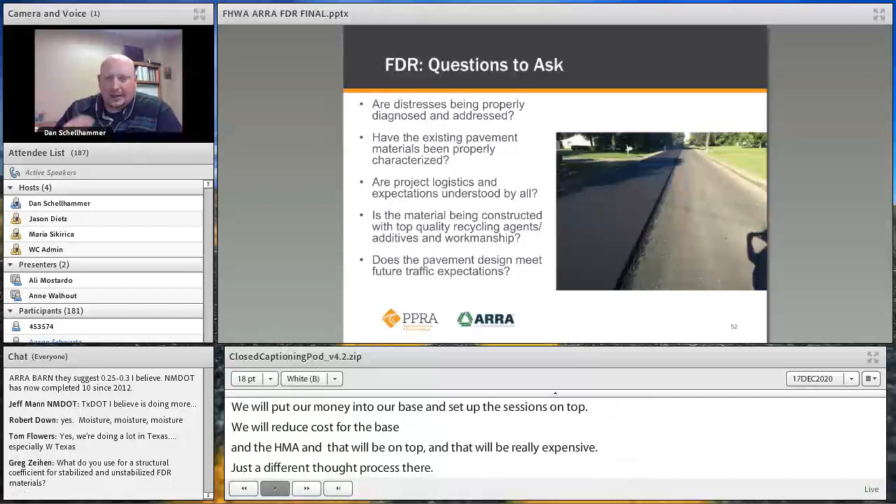So some questions you always want to have addressed when looking at an FDR project: Are the distresses we're seeing being properly diagnosed and addressed? Have we found all of them, and are they going to be taken care of by the construction process we selected? Have the existing pavement materials been properly characterized? Have we done an accurate pavement assessment?

Project logistics - are those understood by everybody? Are we specifying fly ash on a job where the closest fly ash terminal is 400 miles away? We should find something cheaper.

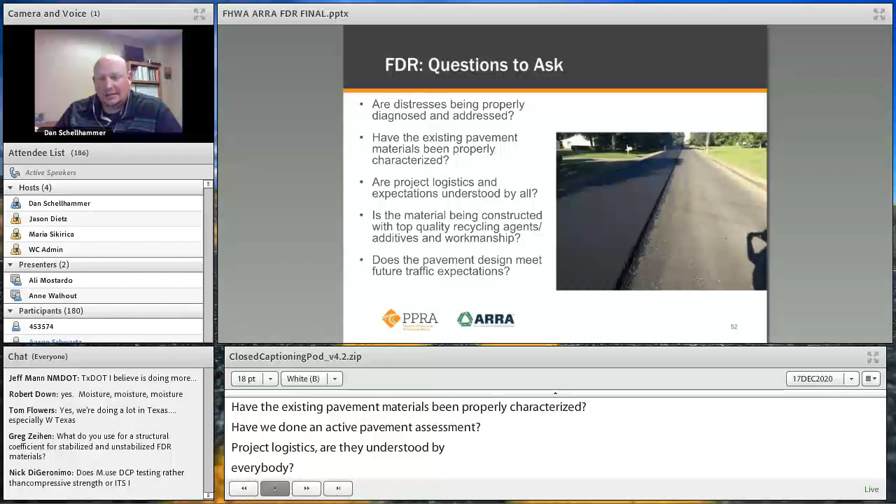Is the material being constructed with top quality recycling agents or additives and workmanship? They always should be. How can you control it? You control it through your specification by specifying exactly what you're looking for on a job, and maybe having an experience requirement for your contractors.

And you always need to make sure that the current pavement design you're putting together today will meet your expected future traffic expectations.

So just tips as it relates to FDR: you want to utilize a modern reclaimer whenever possible, and a modern vane spreader. This is what's going to give you those consistent results - you're going to have that calibrated injection pump on the reclaimer and the calibrated vane spreader, and that's what's going to help produce the results you're looking for.

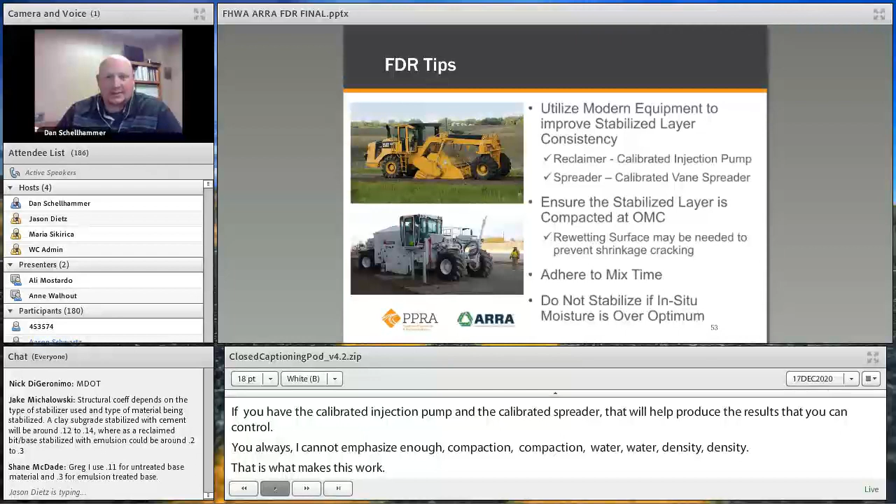You're always going to want to - I can't emphasize enough - compaction, water, density. That is what makes this whole system work. You need to ensure your stabilized layer is being compacted at optimum moisture - that's what's going to give you your durability and long-term strength. It's just key on these projects out in the field.

We always want to adhere to your mix times - we don't want to break those initial bonds of that material curing out and starting to do its work. We've got to get off of it.

We never want to stabilize material if it's over optimum moisture - over optimum, you're not going to get your density. So if you have a rain event the night before you're going to start stabilizing, you might need to wait till noon the following day till things dry down, or maybe even wait a full day.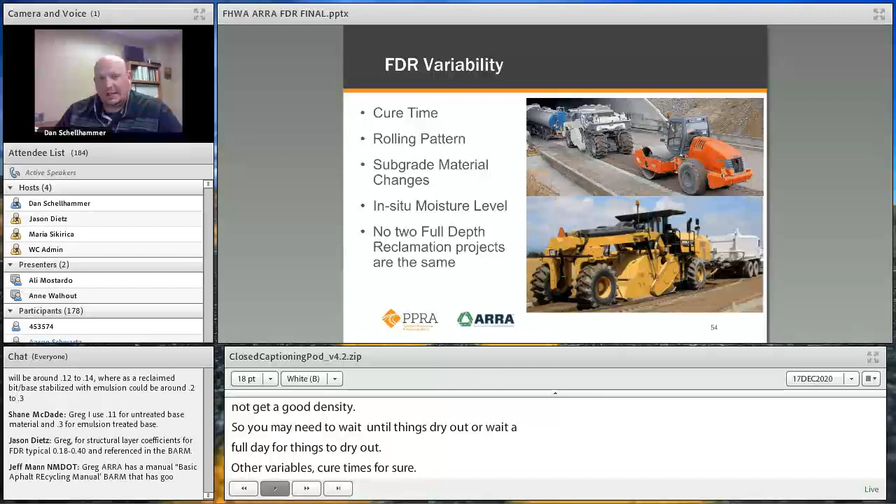The variables you see in the FDR process: cure times, for sure - that'll change with the additive you have in there, the material you're stabilizing, and weather conditions. Your rolling pattern can be variable as those in-situ materials might change. You have to keep an eye on subgrade material changes, so you can account for that in your rolling pattern.

And also you want to ensure that you never assume an FDR project will go a certain way - you'll be tricked or lulled into a sense of complacency. No two are ever the same.

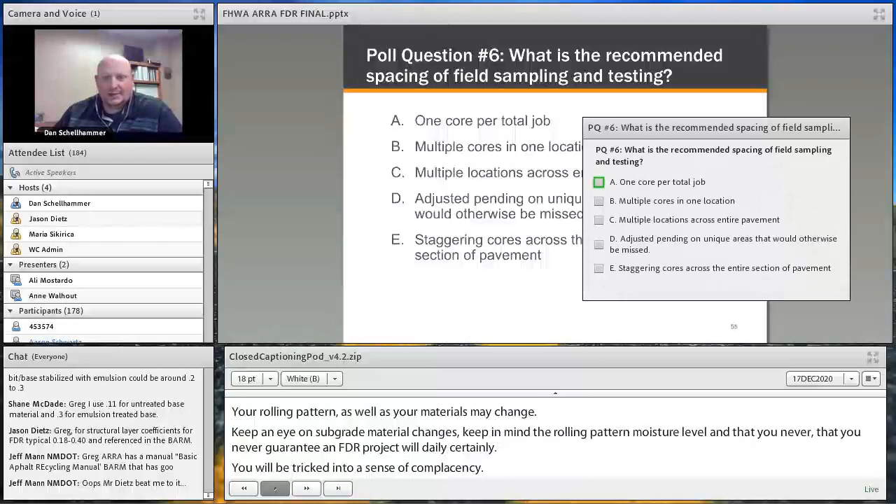Another poll question here, let's see what folks think. What is the recommended spacing of field sampling and testing?

Great answer there. The answer is C, D, and E.

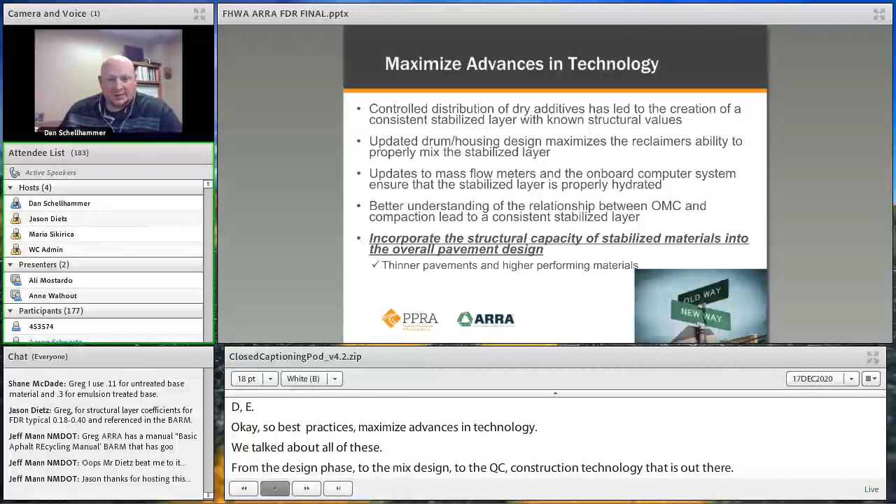Best practices: maximize the advancement in technology. We've talked about all of these - whether it's from the planning phase, to the design phase, to the mix design, to QC, to the construction technology that's out there. Use all the tools that are available to you and incorporate those into your job. That's what will help you have a successful FDR project.

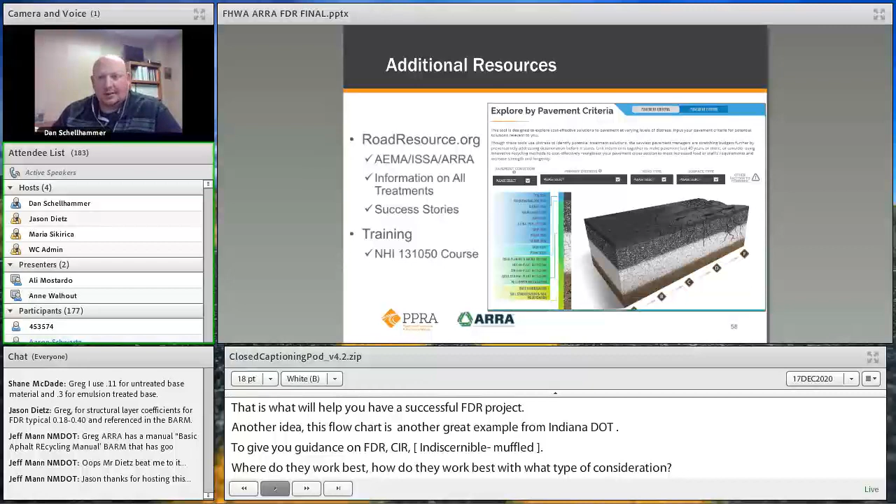So now we're getting out to those resources. I talked about roadresource.org. It has a ton of information. It will help you out a bunch. It's a great tool and a great thing to get yourself up to speed on. Roadresource.org. Training available. The NHI's 13-10-50 course is available as well.

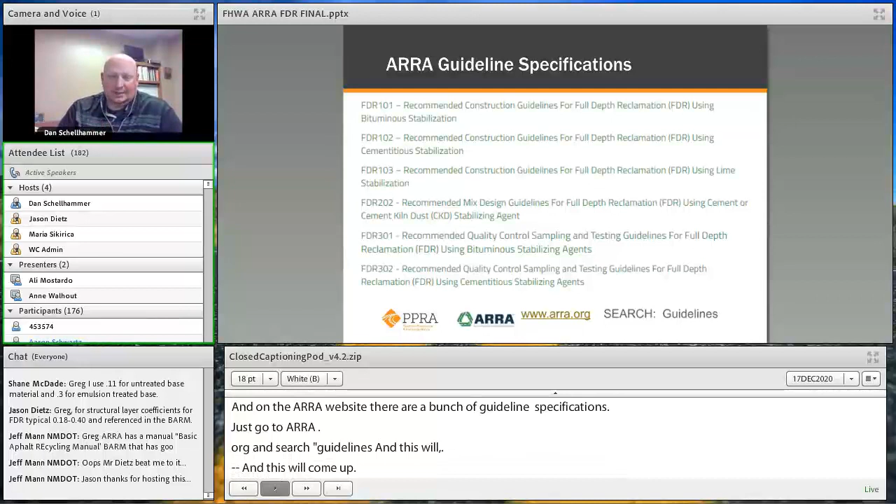And then on ARRA's website, there are a bunch of guideline specifications. Just go to arra.org and search guidelines, and all of these will come up. There's guidelines for bituminous stabilization with FDR, cementitious stabilization with FDR, lime stabilization with FDR. There's best practice construction guides, quality control sampling guides, testing guidelines. Many great resources are there and available for free on the website.

Some additional resources for specifications, right? AASHTO has some of those. Like I mentioned, ARRA at arra.org, you can find those. And then many states have construction specifications that they're successfully implementing today. So reach out to your network to some of those folks and see what's working for them and get some eyes on them.

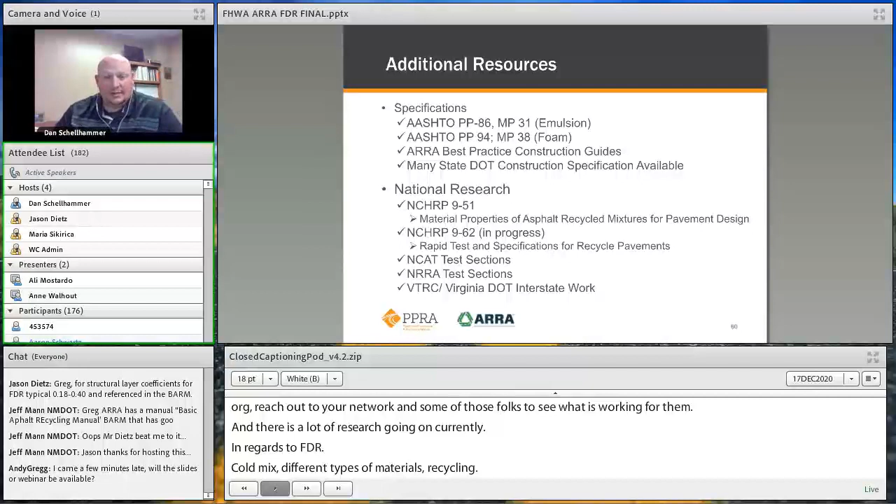And there's lots of research going on currently in regards to FDR, cold mix, and these types of materials and recycling through the NCHRP process. That 9-62, they have a rapid test that they're bringing out to know when that material is cured out, the short pin and long pin test. That's pretty interesting what they're working on there.

There is a lot of research currently ongoing at both NCAT and the NRRA at those test sections up at MnROAD. Virginia DOT is doing a lot of great work as well. You can follow up with. Do have some helpful links here for folks to find more information.

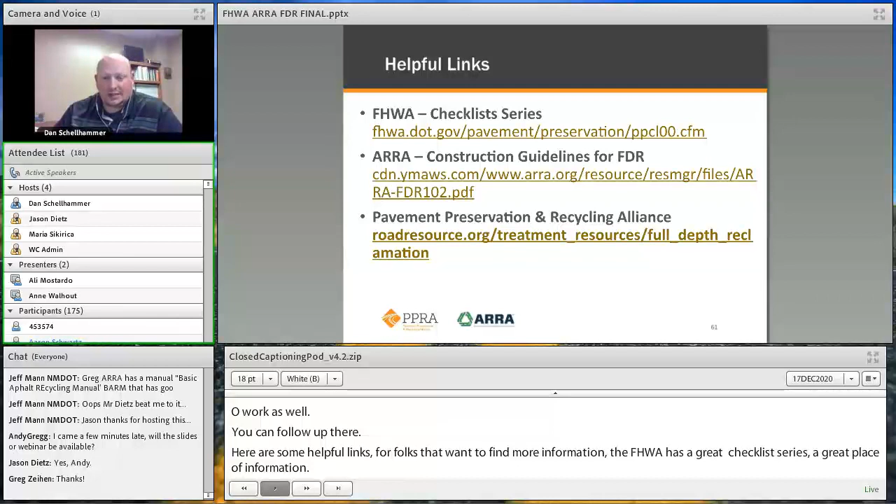The FHWA, right, they have a checklist series. Great source of information. Again, ARRA, and then roadresource.org. The Pavement Preservation and Recycling Alliance have put together a lot of information on FDR.

And the BARM, it's an oldie but a goodie. It's steady, and it's a great resource. So it's the Basic Asphalt Recycling Manual. It was originally published in 2001. It got a refresh in 2015, and these are actually really easy to get a hold of. All you have to do is go to ARRA's website, find a contractor member that's local or close to you geographically, reach out to them, and they'll get you a copy of the BARM if you're interested.

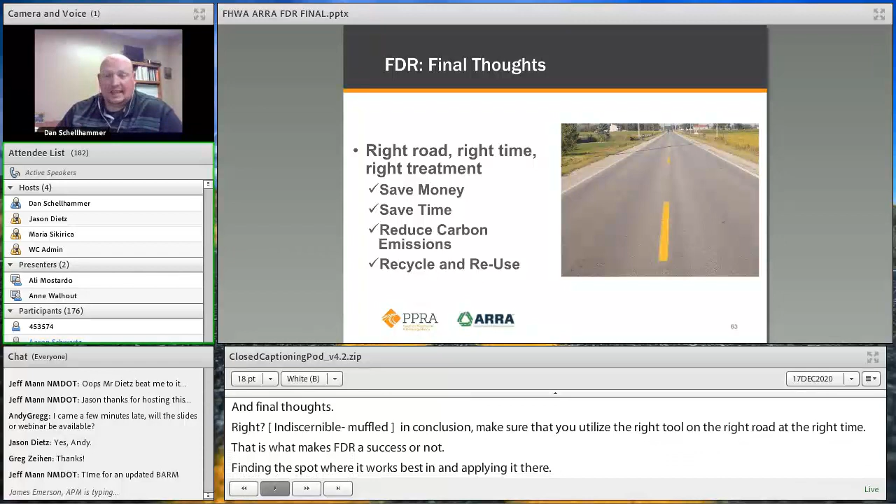And final thoughts, right? We keep hammering on all these, but in conclusion, we want to make sure we're utilizing the right tool on the right road at the right time. That's what makes FDR a success or not, right? Finding that spot where it works best in and applying it there. When you do that, you're going to save money, save time, and you're going to be doing the sustainable thing of reducing carbon emissions and then recycling and reusing your materials.

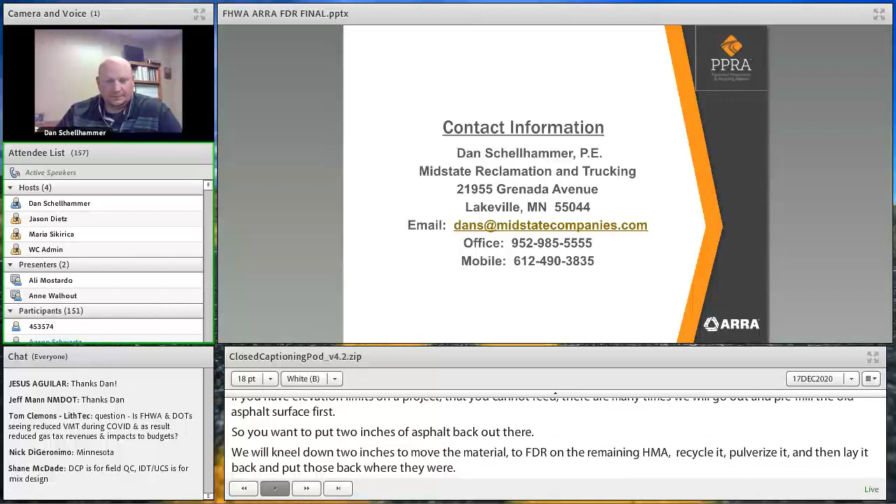All right Dan, here's a question: any studies on how deep compaction can be met with FDR foam? I don't know of specific studies, but have experience going to depths as deep as 10 inches. We haven't done a 10-inch job ourselves yet, but if you have the right compaction equipment, I wouldn't have any issues going 12 inches. The issue you might run into at that point, at 12 inches, is it's a lot of oil and a lot of material to mix and get through the housing, so the process is going to go slow.